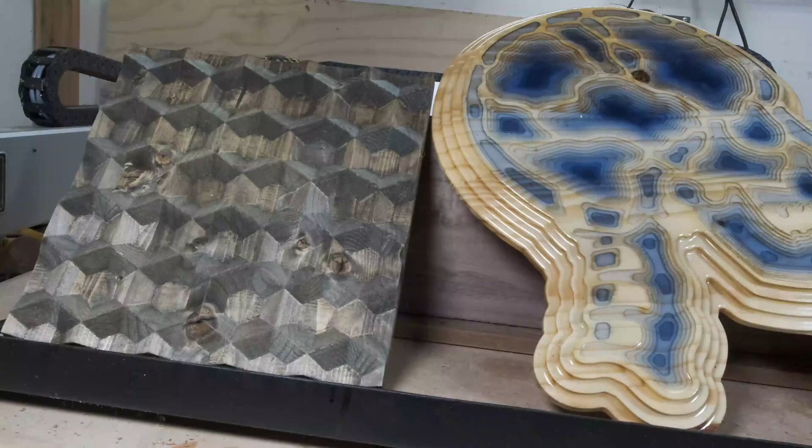How do you design stuff like this, program the CAM software, and mill it all with Alibre Workshop? Let's get into it. If you want to skip, design's at 16 seconds, CAM's at 7 minutes, and milling is at 14:35.

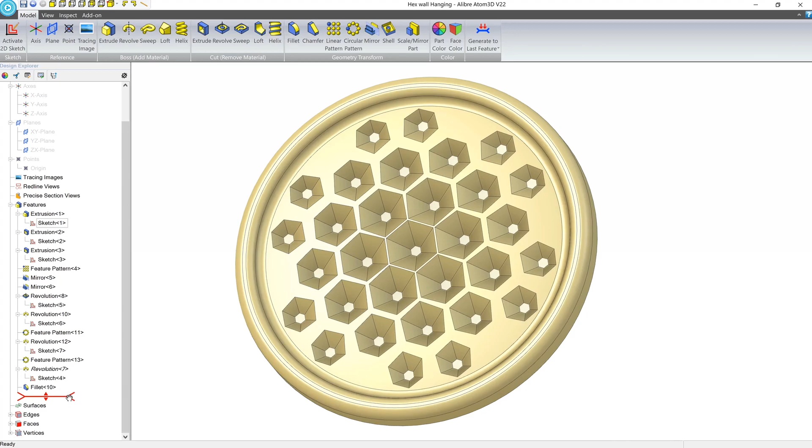Here we have our finished art piece, and we're going to go ahead and roll back in time to show you how you might go through the steps to make something like this. We'll drag the dog bone to the very first extrusion. And while we do this, we want to make sure that we have sketches and reference geometry turned on. So we'll go to the View tab and we'll turn both of those on.

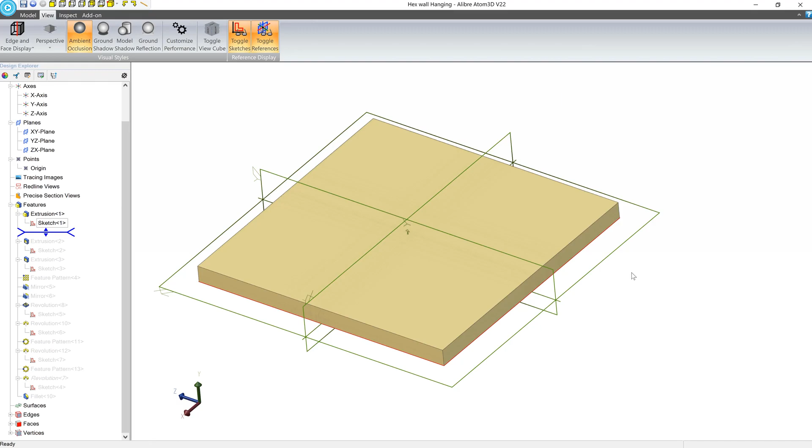So the first thing that I did is I made a representation of my stock. And I don't normally do this, but because I wanted to maximize the size of the art piece, and I didn't know how close I actually wanted it to get to the edge, I figured it would be a good exercise to just model it.

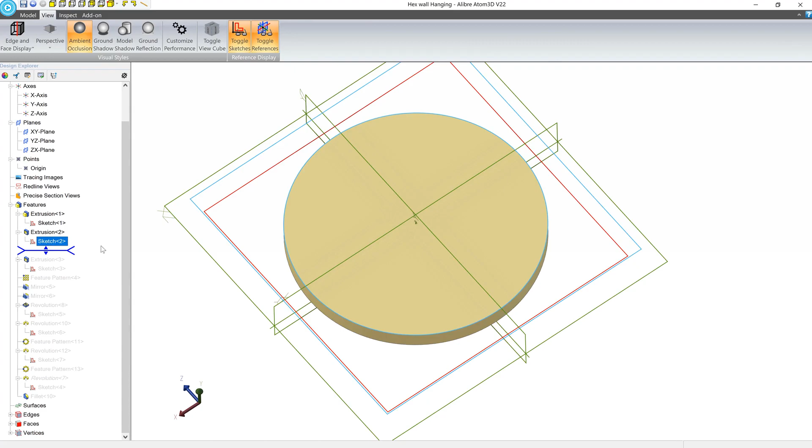The next sketch that I did was actually creating the blank for the art piece itself. And this gave me the ability to kind of gauge how far off I wanted it to be, because I'm not making this to a defined size, I'm just making it to where it looks good to my eye. So to make this, I just created a circular sketch at a defined offset of 0.8 inches from the edge of the stock. Then I made another square around it, such that when I did an extrude cut, all of this excess material between the two profiles would be deleted.

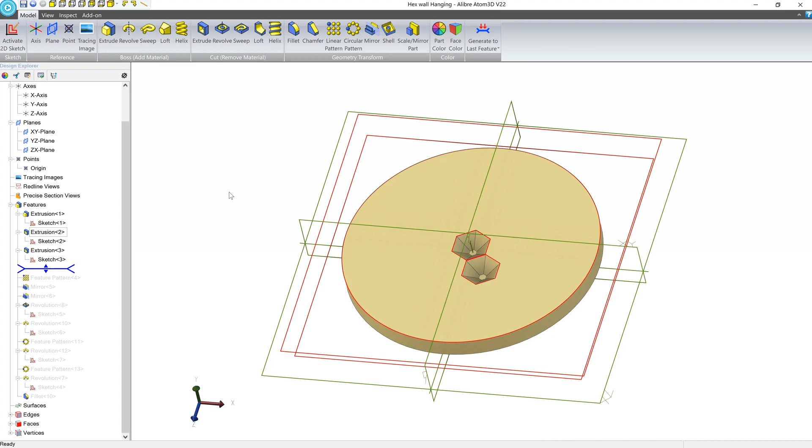At this point, we start to get into some interesting geometry. So to do this, we basically create two hexagonal profiles. And we can create a little bit of reference geometry using this little triangular reference line setup, such that we can offset these in a way that when we pattern them later, they'll all be perfect.

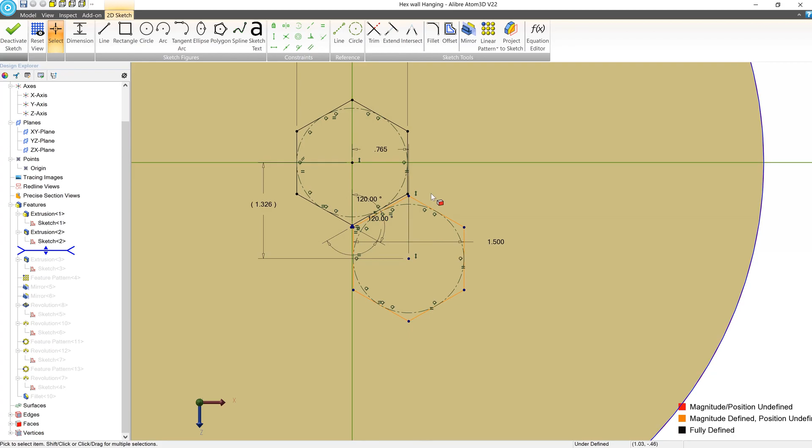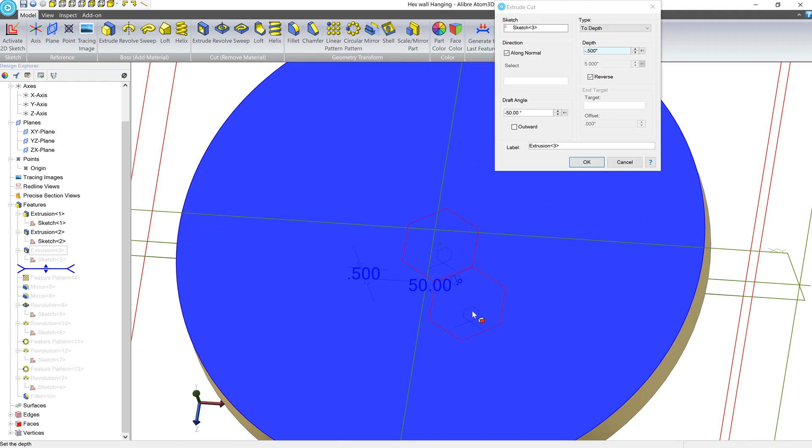Now, when we did the extrude cut for this, we didn't just do a basic cut. What we did was we added a draft angle. And the draft angle can basically take the profile and it'll go inwards or outwards. And we can see that we have -50 here. And so that's going to bring the profile inwards as it cuts. And we can see that we have a little preview at the bottom. So you can play with these angles and the depth and things like that to kind of get the appearance that you want.

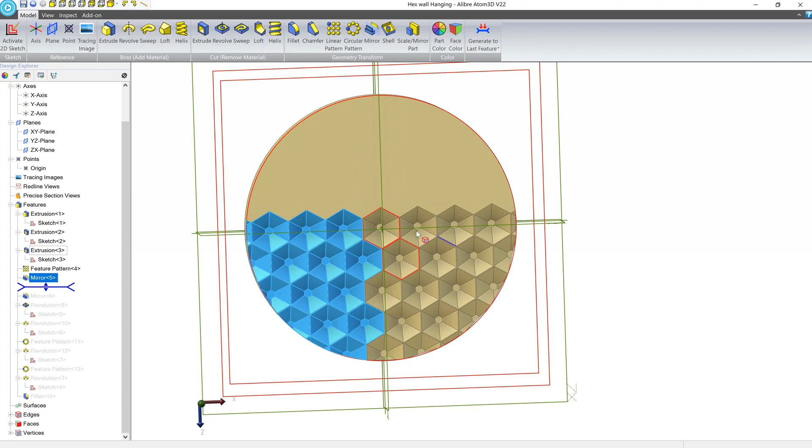Now what we want to do is make this happen everywhere. So we're going to go to Pattern, and we can see that we're starting to get some really interesting geometry. But it's only on 1/4 of the object. And we've done this in such a way that it's pretty easy to mirror. So we're going to mirror both the original feature and its pattern across the axis. And then we're going to do that again for everything. So now we've got this really cool object that we can mill.

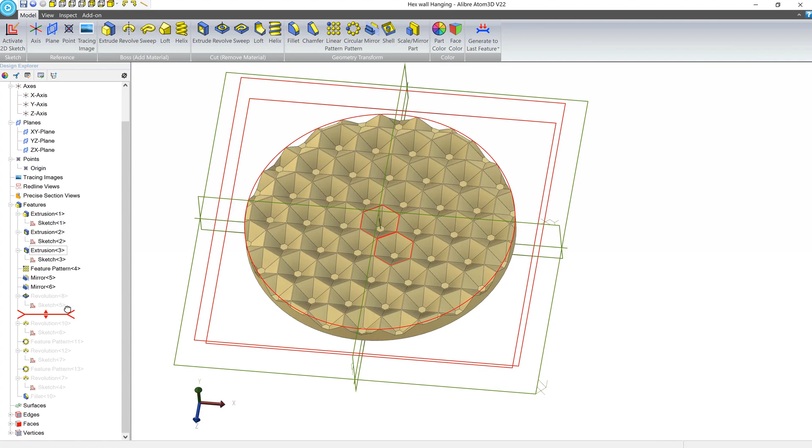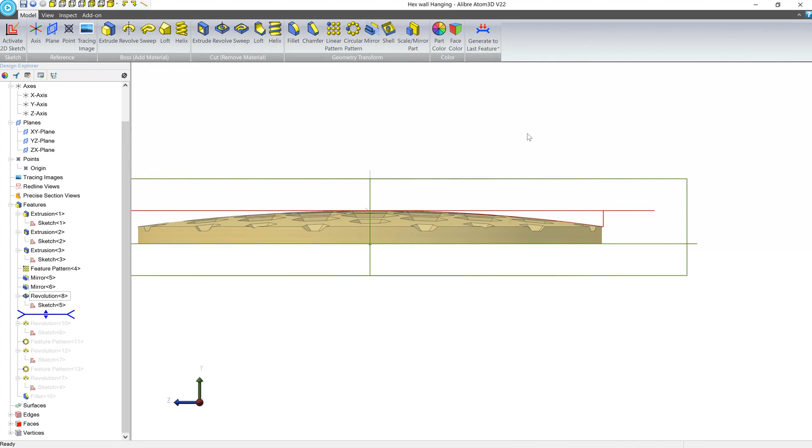And we were trying to think of a way to make it a little bit more interesting. I mean, this is pretty cool already, but what we did was created a sketch that was basically an arc. And the arc would start at the center, and it would slowly cut away material as it goes. So we're cutting everything in between this little profile here. And the result of that is when we look at it from the side, we get this beautiful domed appearance. And the other effect of that is that due to the way it interacts with the geometry, we get this interesting spacing effect as well, which I thought was pretty cool. So I decided to keep it.

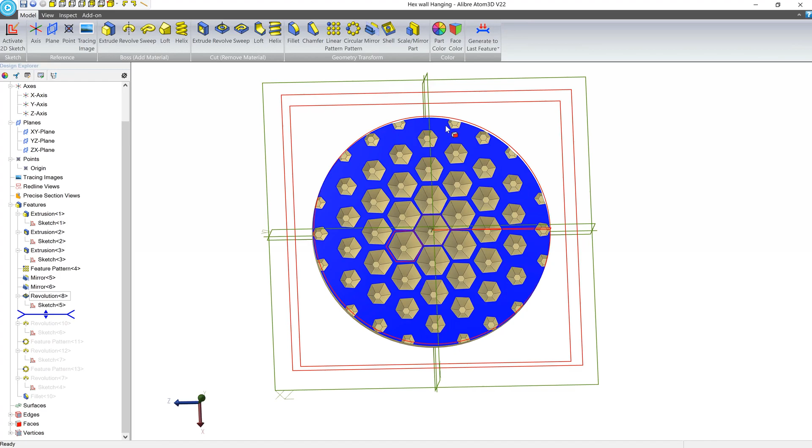One thing I did know, though, is that on the edge, I wanted to have a lip. And some of this was a little bit too busy. I thought it would be cool if we could separate out some of these from being in the model. The way I decided to achieve that was to do something very similar to the way that we cut the model to get this dome shape, but just kind of in the reverse.

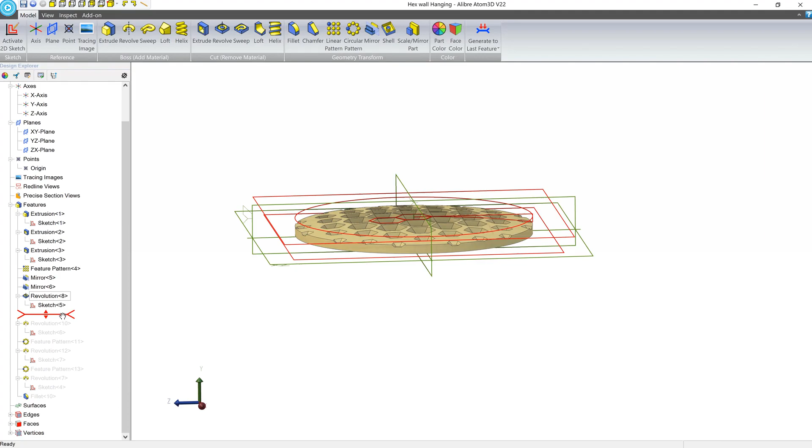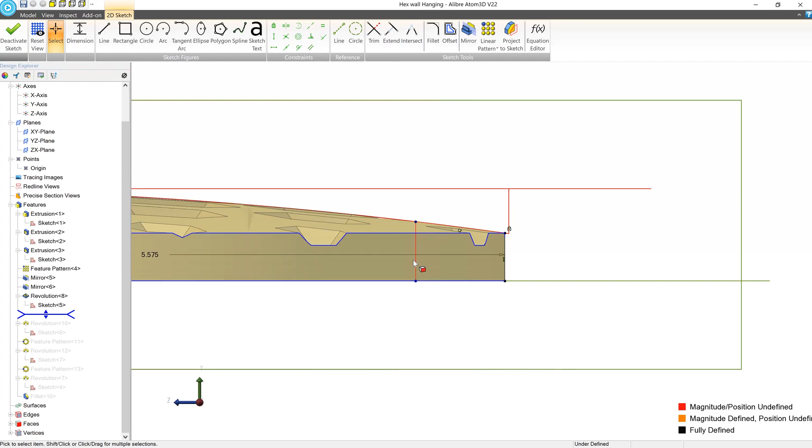So what I did there to get rid of this first one, which is the equivalent of these guys, is we just created another sketch. And instead of this first sketch, which we used to cut the top of this, I copied it and pasted it onto this sketch and removed this part of a line and this part of a line and this part of a line. And I just made these extra lines go down. So now we have a closed profile here. And instead of doing a revolve cut, we'll do a revolve boss, which adds material.

So our strategy is to have this profile, which exactly matches up with the top of this dome. And we're going to add material in this direction and in this direction so that we can get rid of these three.

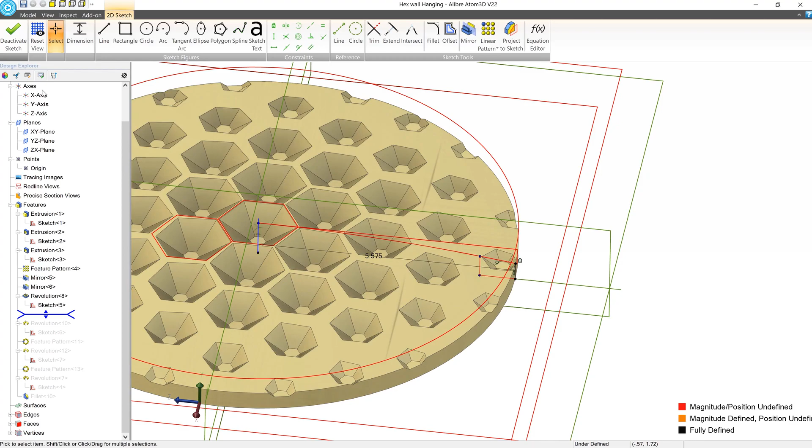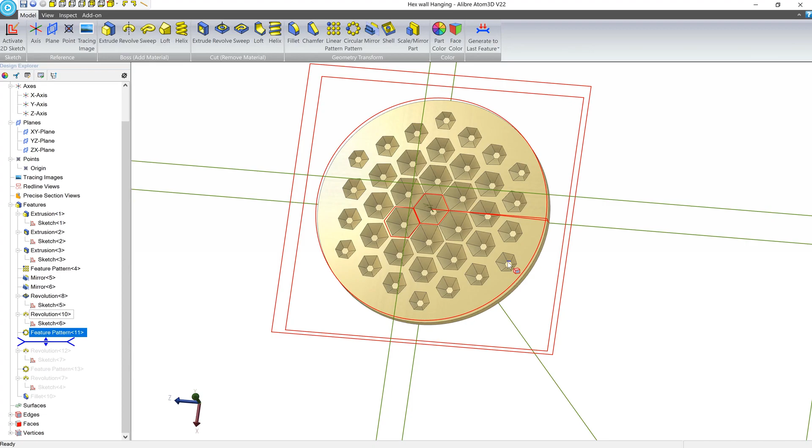Now that we've cleared out this section, we can take advantage of symmetry to do the same thing on all of the others. We'll just do a feature pattern here of that revolution that we made. And now we've cleared out most of the edge. We still have a little bit more clearing out to do. These guys here on each of the corners, I want to get rid of as well. And we're going to do the exact same process to do that.

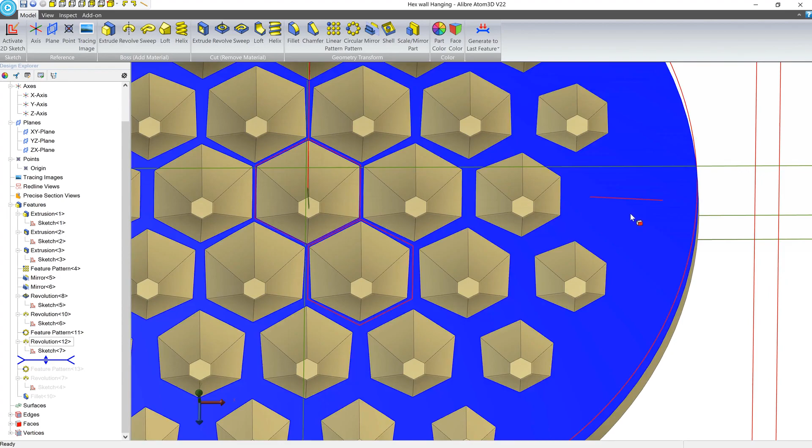So here we can see we've created another sketch very similarly, but it's just offset a little bit. And it's targeting this one specifically. So we'll deactivate sketch mode and the feature will evaluate, and we can see that that one is now gone. And in the same way that we did last time, we're just going to use a feature pattern to make all of the other ones gone.

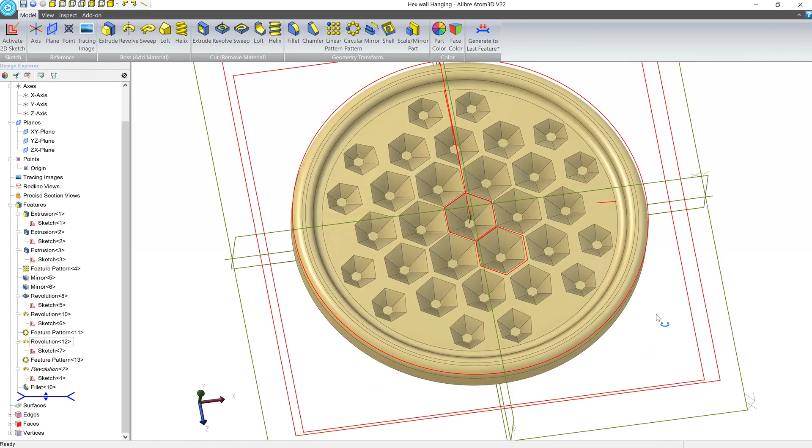The last step that we'll do is we'll make a revolve with a nice little profile to put a lip on the object, and then we'll add a fillet. And there we go. That is pretty cool. And we can look a little bit deeper on what's going on by going to the Inspect tab and activating a dynamic section view. Let's turn off our reference planes with Control-Shift-P and our sketches with Control-Shift-K.

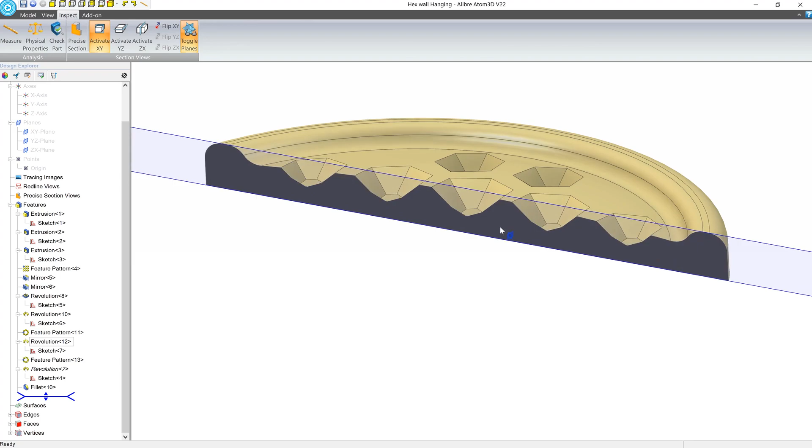And we can see that we can drag this and we get this nice, beautiful sweeping profile that should really catch the light in the right circumstances after we mill it and hang it on a wall. It's going to be gorgeous. Now that we're at this stage, we are ready to go into CAM software. So let's go ahead and export this as an STL.

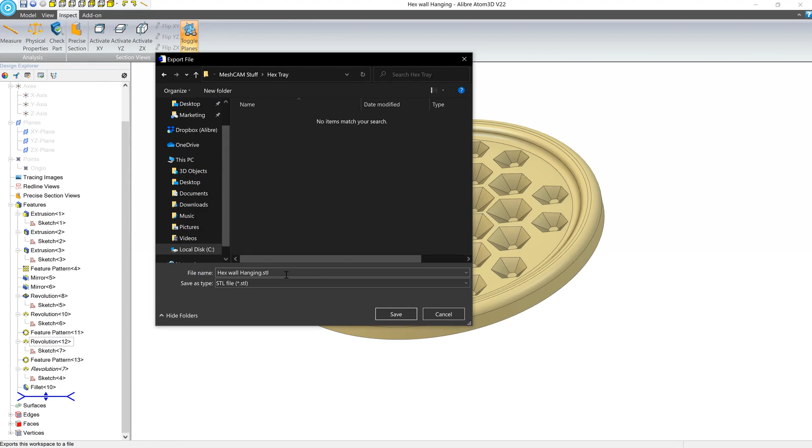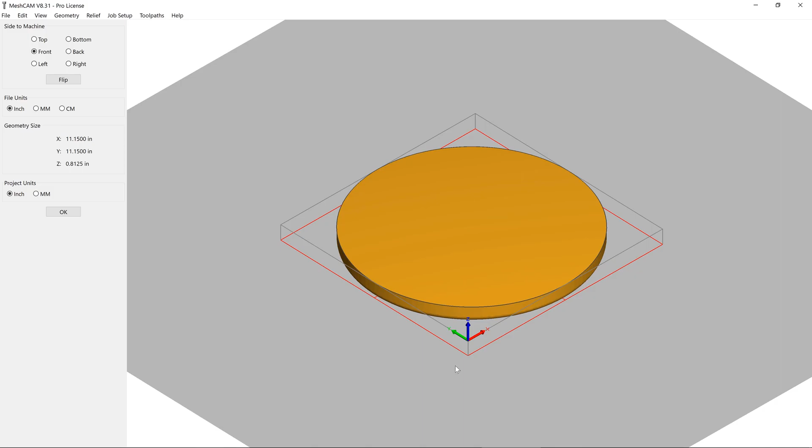Now that we're in MeshCAM, the first step, as usual, is going to be to load the STL file that we just made. This is called Hex wall Hanging.stl. We'll bring it in and we can see that it's flipped upside down. And the reason it's flipped upside down is because when I modeled it, I wasn't paying a ton of attention. And I probably should have modeled the Z positive direction to be the top. But no problem, we'll just click flip and we're good to go. Let's go ahead and accept the change.

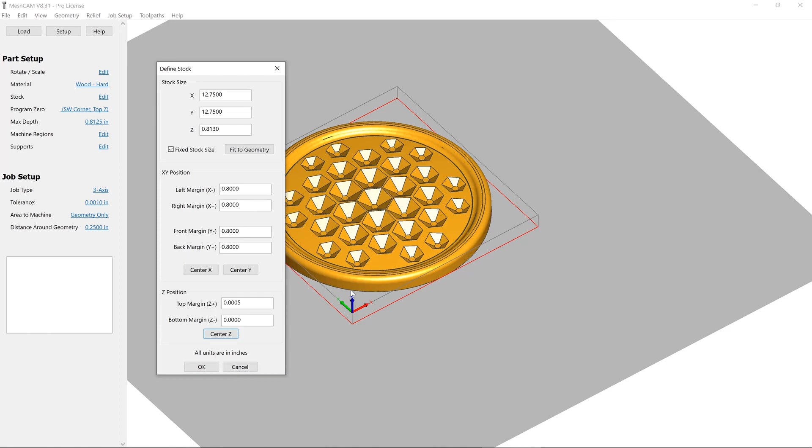And as usual, the first thing we want to do is to define our stock. We happen to know that our X and Y is going to be 12.75 because that's what we measured our stock piece to be. And the thickness is going to be 0.813. We'll do a fixed stock size, bottom margin of 0 as usual, and that's just going to place the model at the bottom of the stock. So things are looking pretty good. If you can remember the modeling session, you can see that these are about 0.8 off the stock, so it's looking all consistent. The next step that we want to do is going to be to add supports.

And this is going to be a pretty big object. We're going to be using big mills. We're going to go fast. So we want to make sure that we have a reasonable support structure so that when we start to cut things out, it doesn't start moving around on us. So in this case, we're going to go 0.4 by 0.4. We'll place it in the middle of the geometry and we'll press OK. And let's just make 4 of these guys and done.

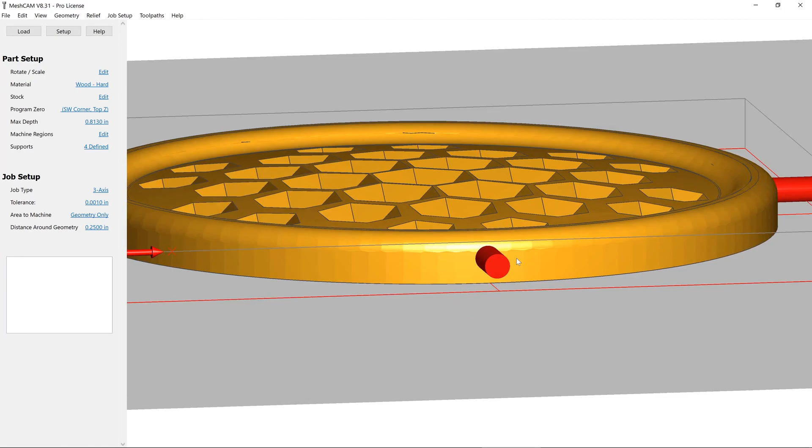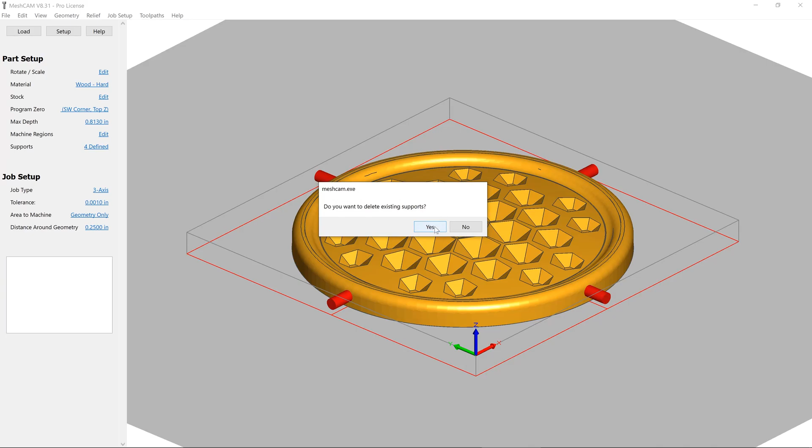So we can see that we might run into a little bit of a problem here because, it's not a huge deal, but the very top of these supports is kind of running into this curved part of the fillet. And it's nothing that some sanding won't fix. But why make your life hard, right? So let's go back into our supports. We'll delete all of these guys. And maybe we'll just put it at the bottom of the geometry. There we go. So now we're totally clear of this nice fillet, and we only have to worry about the curvature of this when we get into post-processing later.

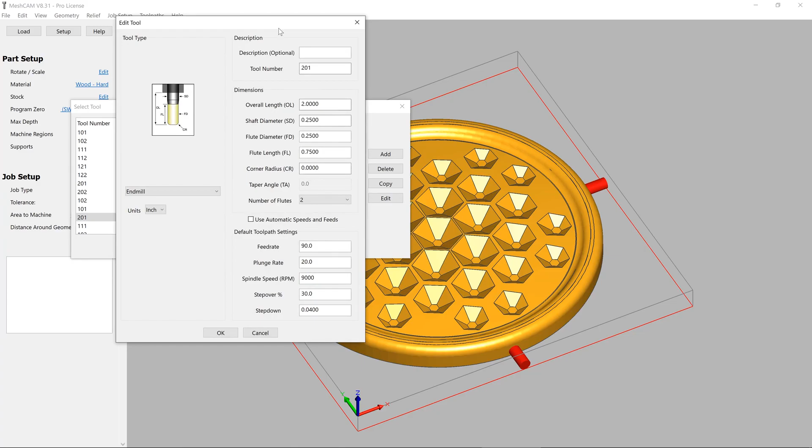So cool. So because MeshCAM has automatic toolpath parameter generation, we want to take advantage of that. So we want to make sure that our material is defined correctly as wood. And now when we go into toolpaths, roughing, we're going to select our end mill. And we're going to be using 1/4 inch end mills to do the roughing here. So we'll select tool 201. And just because when we created this tool, we're going to turn on use automatic feeds and speeds here.

And now every time we insert this end mill into a profile, it's going to look at the material, it's going to look at what it's doing, and it's going to automatically select appropriate feed rates, plunge rates, and other values. Now, of course, you can modify these. These are just suggestions. But if you know your machine and you know you can go faster or cut deeper, certainly do that. Let's go ahead and press OK. And let's calculate our toolpaths. Now that we have this calculated, let's do a quick simulate.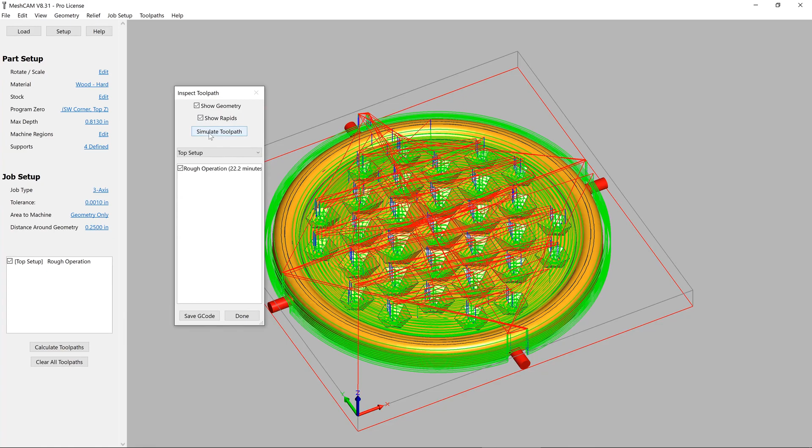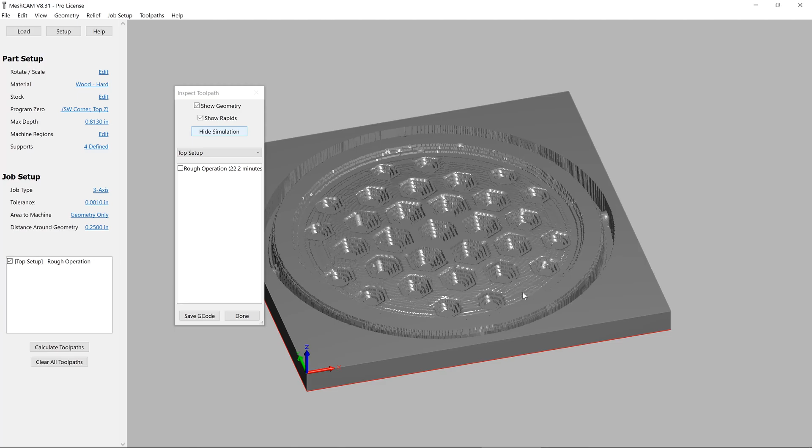And we'll turn off the visibility of the toolpath, and we can see that this is what we're left with. So the point of roughing toolpaths is to take as much material as possible and get pretty close to the actual geometry, so that when we do a finishing toolpath later, that toolpath doesn't have to cut through a whole bunch of stuff. And we want to do this as quickly and aggressively as our machine will allow. Anyway, this is starting to look good.

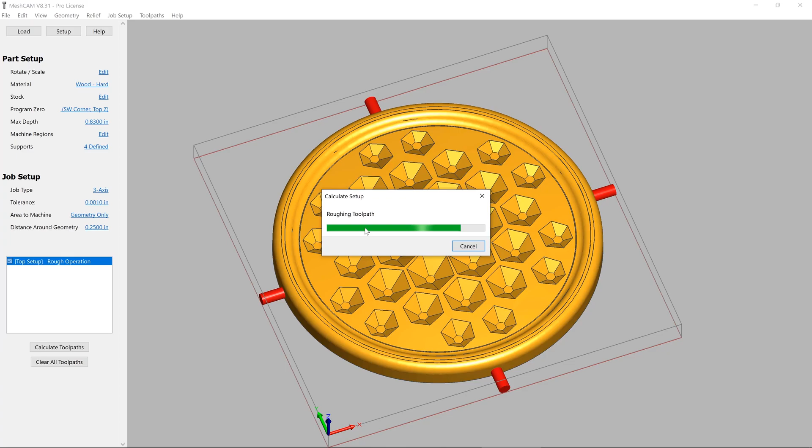And the only thing that we might want to change here is we notice that we're not going quite all the way through the material. And wood has variation, so maybe it'll go through in some places, maybe it won't, because we're right on the edge. So we can change the max depth that we're going to machine to be maybe 0.83, a pretty minor adjustment. But what that'll do when we calculate the toolpath again is take care of any possible variations in the wood. If maybe part of it's thicker than something else, or our table isn't perfectly flat, it'll just cut through just a little bit deeper than it expects to.

Now, if we were to simulate this, we can see that we're actually cutting through, and this will make it easier to release on the table and have less post-processing at later steps. Now that we have our roughing operations done, let us blaze ahead with our finishing operations. We're going to use 2 finishing operations for this object because the geometry requires it. It doesn't require it, but it makes it a whole lot easier for us.

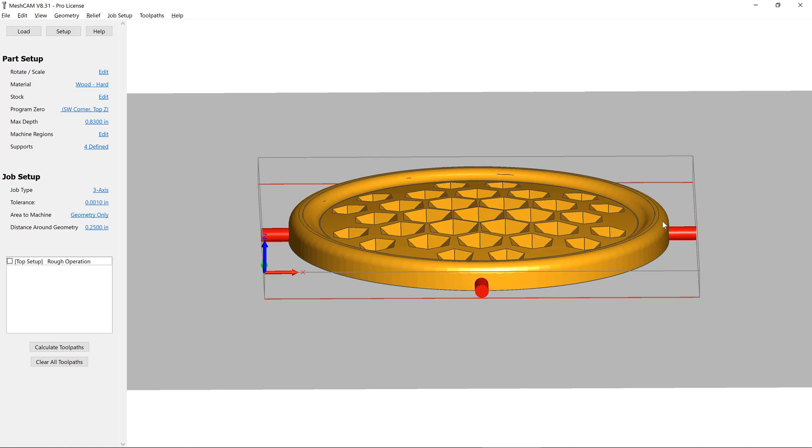So for flat areas like this, with a little bit of curvature or even just flat, this is great for a parallel finish toolpath. So that's what we want for the top of this. And for things with walls, like these insets or the sides of this fillet, those are great for waterline toolpaths. So let's go ahead and set up a waterline finishing. And we're going to use a 1/4 inch ball mill to do this. We're going to set our threshold angle to be 10. And what that's going to do is just limit the waterline to be the areas that we desire. So let's go ahead and do that.

And now finally, we'll use a parallel finishing toolpath. Same thing with the ball mill. We're going to limit the toolpath to shallow areas and set a threshold angle. And what that's going to do is make sure that this toolpath only stays on the top and on the bottom here, and perhaps even on the top up here. So let's go ahead and press OK, and let's calculate that and see what we get.

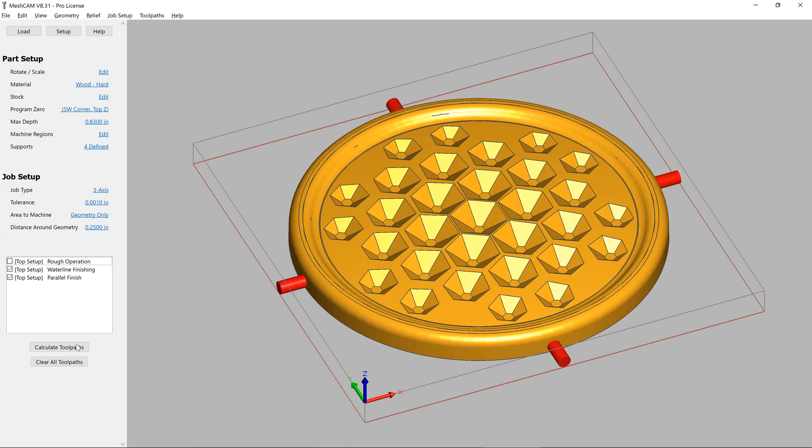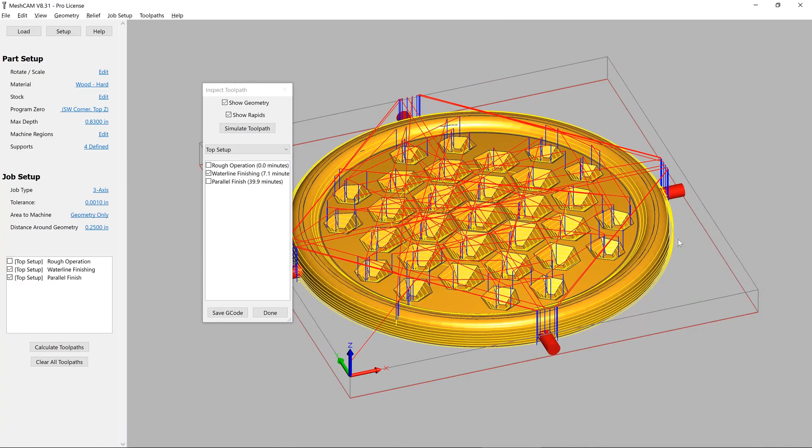Okay, so if we look at only our waterline finishing, we see that it's in the right place. It's only targeting these areas that we want and on the sides, but it's a pretty aggressive finishing operation. And it's not going to leave us with a very good surface finish. You can see how far away these are from each other. So we'll modify that in a second. Let's go to parallel finish. And we can see, as we desire, that it's only going on the top surface of this object. Cool. So let's go ahead and just modify our waterline.

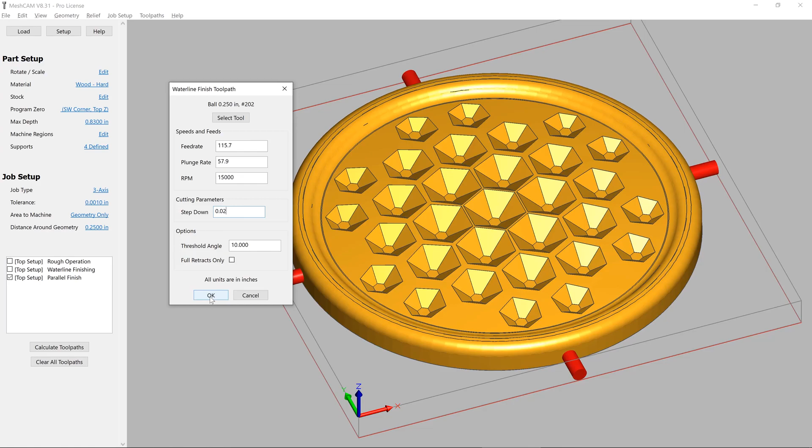And the reason that it's doing that is because the step down is pretty aggressive here. Let's change that to 0.02. And this may make it take a little bit longer, but you know what? I don't want to be sanding inside here. I'd rather it come off the machine as nice as possible. So let's calculate that toolpath again.

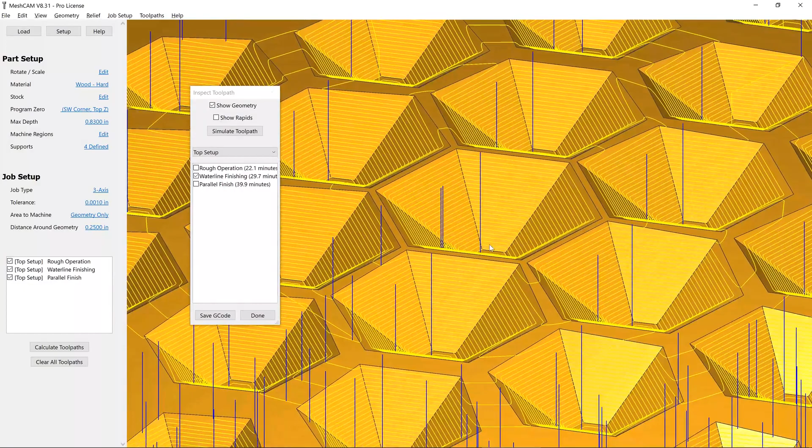So here we have everything calculated. Let's turn off our rough and our parallel finish. And we can see that our waterline, let me turn off rapids too. Our waterline now has a much finer gradation. It should produce a much better surface finish right off the table. Sanding in here is just going to be a huge pain in the butt. Anything we can do to avoid that, we want to do.

All right, so we have our 3 operations. We'll do a final simulation. Turn off all the toolpath visibility, and we are looking really nice. It's time to save this G-code and head over to the machine.

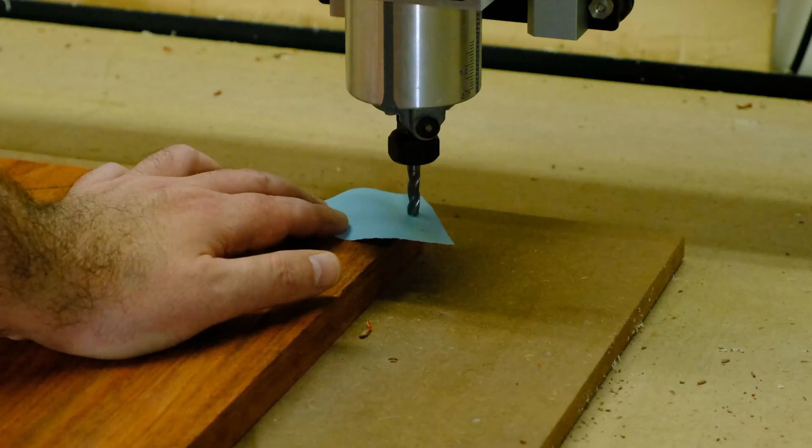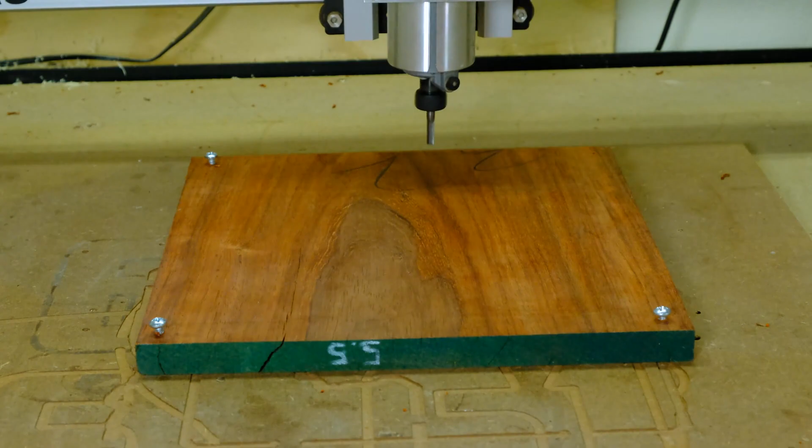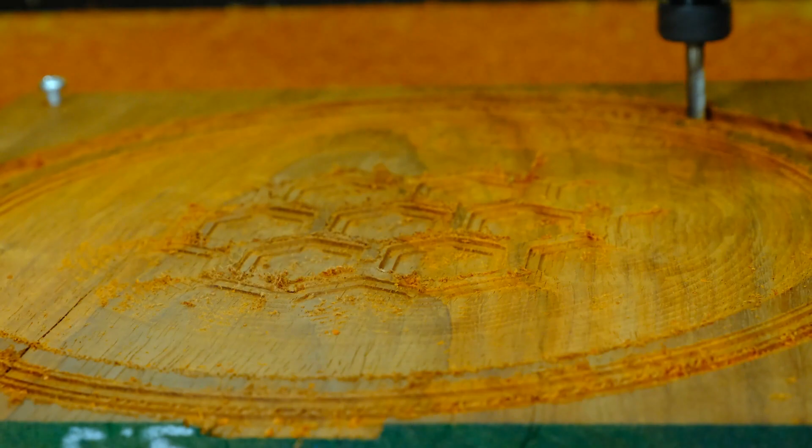We just zeroed the machine at the northeast or top right corner because we didn't want to run the risk of running into some of these other work holdings with the default bottom left corner. The first operation that we're seeing here is the roughing pass. And again, this is designed to remove material and expose close to the surface of the actual model to a final finishing pass. We're starting to go deeper and deeper into the part, and we can start to see the geometry really become exposed as we drill further and further down.

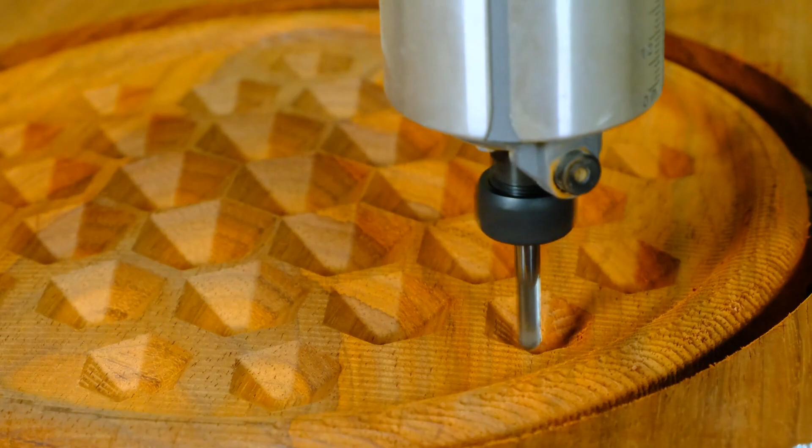We move now into a finishing pass where we can start to see that the small gradations in our waterline finishing are really paying off because the surface finish from these hexagons looks really nice. As we start to finish up the part, we can see that the rest of the part has had its parallel toolpath already executed, and we can start to see the fillets and the nice curvature that we were going for earlier. We're really close to this part being done.

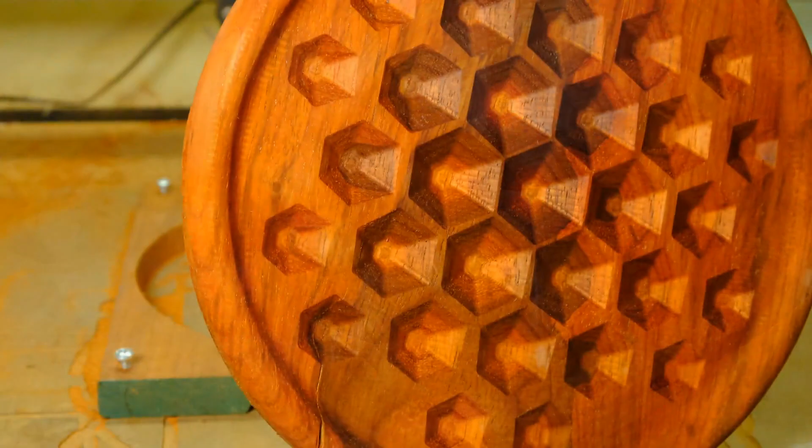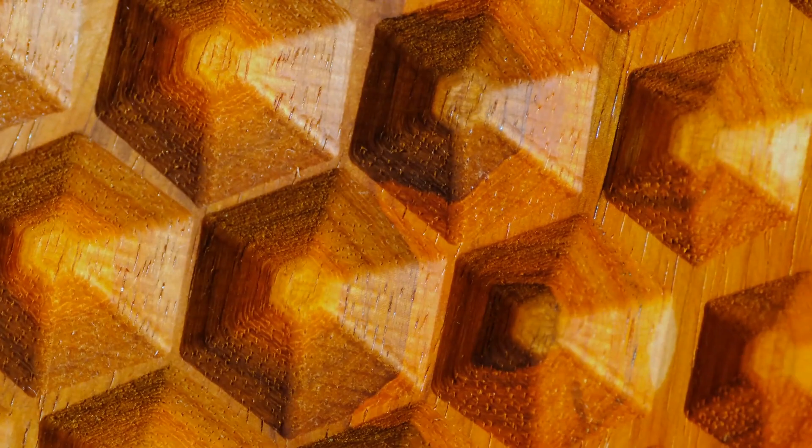And it is absolutely stunning. With a little sanding and some staining, this part turned out absolutely gorgeous. It's going to be hanging on the wall, it's going to catch light beautifully, and it's going to be a showpiece. And we made it all in MeshCAM.